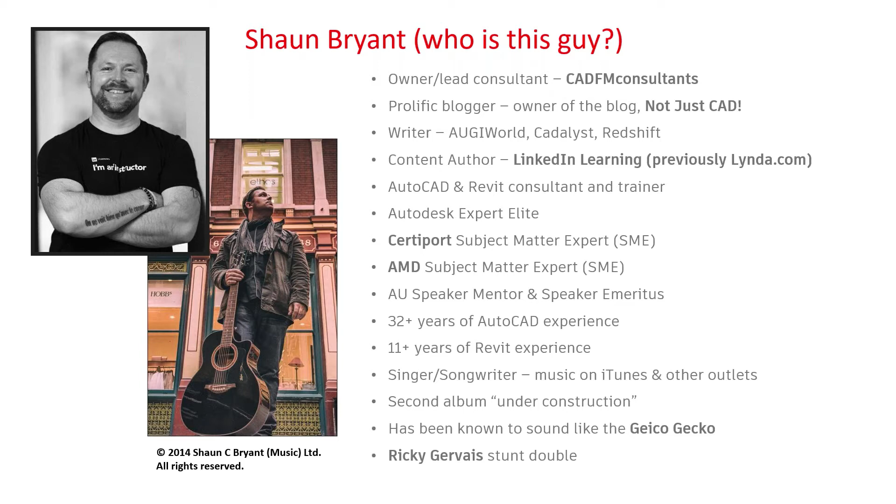So let's jump into the presentation now. The key concepts that we're looking at are AutoCAD, the full AutoCAD, versus AutoCAD LT. What you can see on the screen is a visual comparison as to what you can do with full AutoCAD as against AutoCAD LT. You can see that in the full AutoCAD, we can do 2D, 3D. We've also got the application programming interface in there. We've got parametric constraints, data extraction, and CAD standards. Now, none of those, apart from the 2D, are available in LT, and that's what we're going to discuss today.

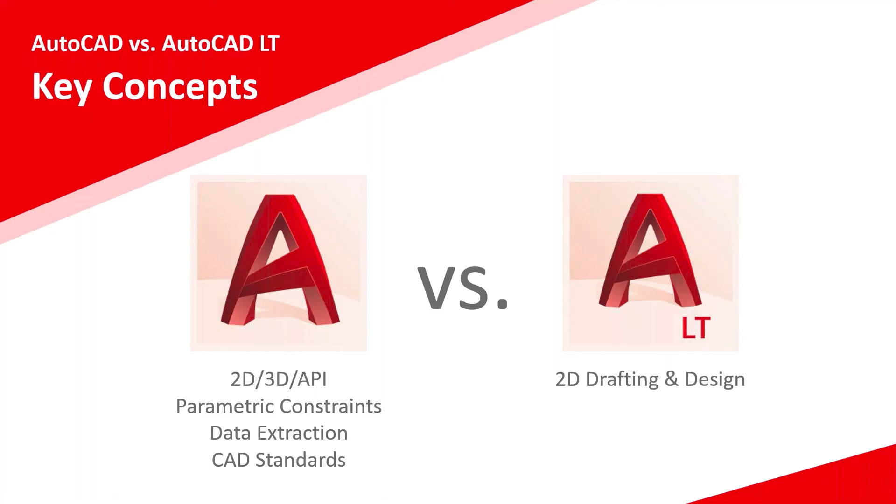We're going to see how, from a productivity and a time-and-motion kind of environment, AutoCAD stacks up against AutoCAD LT. Moving forward now into a really good visual slide, you basically get an 86% overall productivity gain. Now, there is a little asterisk next to that, and there's a little disclaimer at the bottom, basically saying that the study was designed by Autodesk and commissioned to an outside consultant. So your results may differ - you may not get exactly 86%.

But just to give you an idea, that means that when you're working in full AutoCAD and you're doing 14 hours work, that's pretty much the equivalent of 100 hours work in LT, or vice versa. If you're working in LT and you do 100 hours of work, you could do that in 14 hours, hence the 86% productivity gain. Now, what this means is an AutoCAD designer can generate designs up to 7.1 times quicker as compared to AutoCAD LT. That's a pretty cool statistic when you think about it.

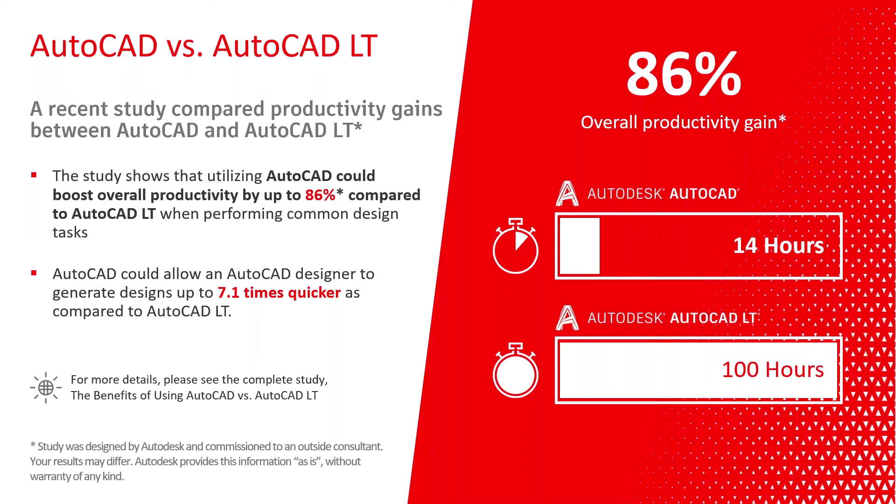And there is a productivity study available from Autodesk. It's called The Benefits of Using AutoCAD versus AutoCAD LT, which is the basis of the presentation today, and we're going to go through that in a little bit more detail. So let's have a look at what the productivity study actually covered, the time savings. Again, a couple of little asterisks there at the top, just to say that obviously every effort has been made to make sure that these tests are as fair and objective as possible.

Your results might differ from the percentages that I'm quoting here on the screen.

Parametric constraints in full AutoCAD offer a complete geometric and dimensional constraint creation, editing and management suite, giving roughly 33% time savings. When creating plans and elevations in full AutoCAD, you can save about 46% because you can manipulate 3D solids when 3D modeling to generate those plans and elevation views, rather than creating them from scratch in 2D in LT.

Isometric drafting is another fantastic tool available in both AutoCAD and LT. But if you create 3D objects, the isometric representations are just a couple of clicks, whereas in AutoCAD LT you've got to use 2D modeling and IsoDraft. AutoCAD can view these 3D objects in isometric views almost immediately using the view cube—I'll go into that in more detail later. The time saving here is 61%, which is huge.

Data extraction is one of my favorites in full AutoCAD, with a time saving of 93%. We've all been there, counting all the objects in a drawing. The data extraction command, not available in AutoCAD LT, interrogates the drawing, providing block, attribute data, and various other pieces of data that can be taken out of the drawing and put into an Excel spreadsheet or database. You can even add an AutoCAD table.

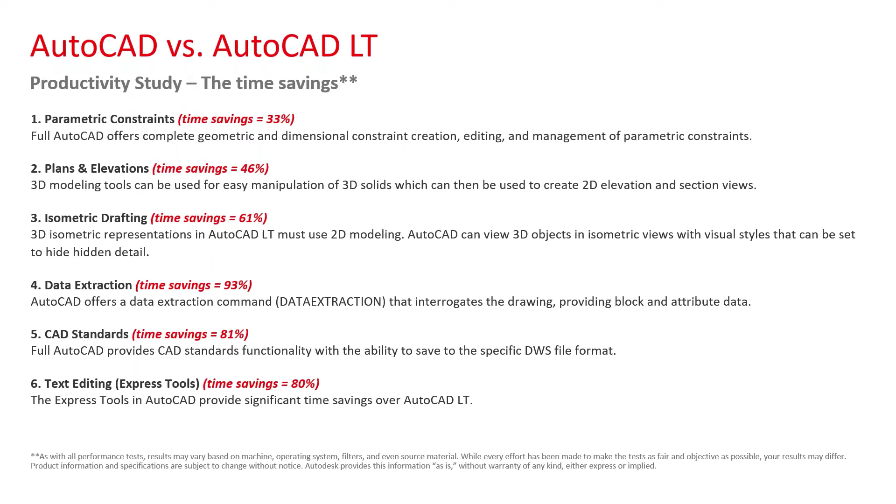So let's move into the first one—parametric constraints. You've got geometric constraints, which relate to geometry, and dimensional constraints in full AutoCAD, with a time saving of about 33%. This means you can assess the geometric and dimensional constraints using the show and hide functions, so they're not there all the time. You can switch them on and off like your layers, and edit or delete those constraints where applicable to allow the design to meet any changes in the specification.

There's no constraint creation in AutoCAD LT, but constraints can be edited and deleted in AutoCAD LT, which can sometimes put the cat among the pigeons. You might delete a constraint in LT, and when it goes back into full AutoCAD as a DWG file, that constraint isn't there anymore. So you have to put controls and procedures in place, especially if you've got a combination of full AutoCAD and AutoCAD LT as your drafting platform within your organization.

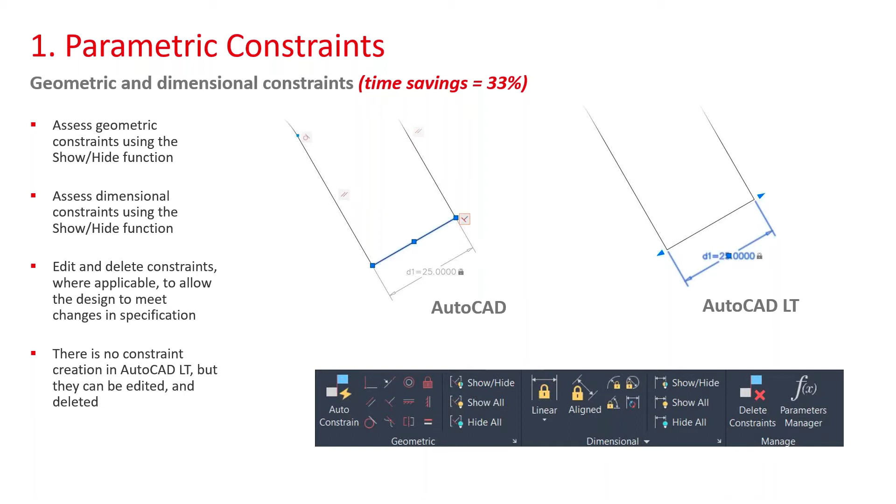What I'm going to do now is jump into a really simple little video that takes us through a simple bracket drawing—you can see at the top of the AutoCAD screen it's bracket.dwg. I'll run the video now and explain what's going on as we go. We've got the parametric tab in full AutoCAD, and what I'm doing now is hitting show all for geometric and dimensional constraints, of which there aren't any at the moment. Then we'll jump through all of the settings.

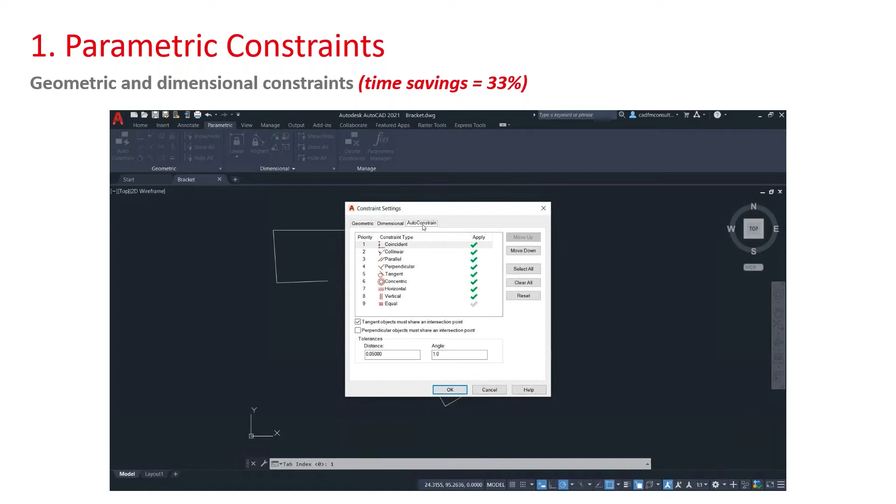You can see that's our geometric constraints for our geometry. If I hit the arrow on the panel, you can see you can put names and expressions in for your dimensional constraints, for example. Then auto constrain—a fantastic function in full AutoCAD—applies constraints to all of the geometry for you automatically. So what I can do here is select everything using a crossing window, press enter, and there are my auto constraints; they've all appeared, and AutoCAD has created those for me. I can then start thinking about concentric constraints, like making sure the hole in the bracket is concentric with the arc at the top.

And then I'll make sure that we've got some coincident points to join up that gap, so those points now are always coincident together. And then we'll start working on some of the line work there, making sure those lines are parallel to each other. And then we don't want a wonky corner there, top left, so we're going to make sure that that's perpendicular as well.

So all of those constraints will hold that bracket together now, and that's our geometry in place. So now we want to think about dimensions of our bracket. I'm picking those 2 points there and applying an aligned dimensional parameter, and I'm going to put an expression in saying D1 equals 25. So that now becomes the D1 constraint, which is 25 units long and it's locked.

I can then consider something like a linear, horizontal, or vertical constraint. I can go linear here because I know that this is already perpendicular to the lines - remember, we put that geometric constraint in. And that's going to become D2, but I'm going to say that D2 equals D1 plus 3. So I'm adding those expressions and tying everything down to pull the bracket together.

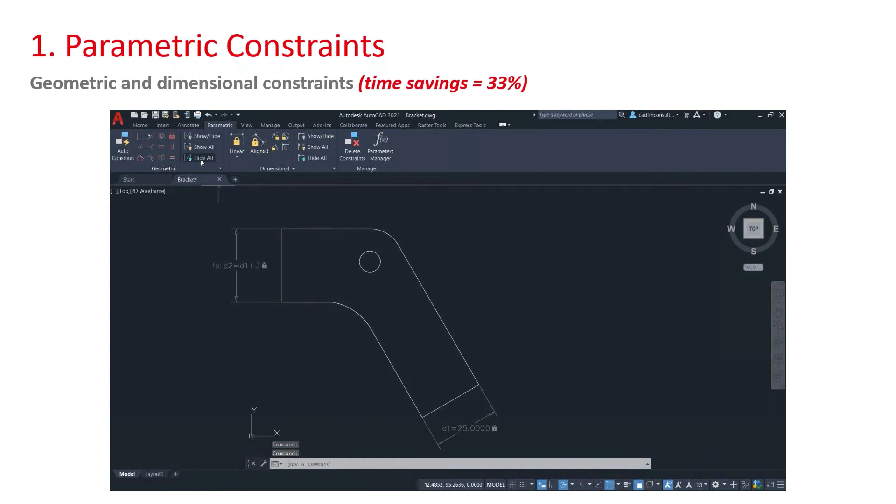Now, obviously that looks a little bit on the messy side, so I can hide all of my constraints like so, and it just looks like a normal AutoCAD drawing now. But what you've got to bear in mind there is you need to interrogate the drawing and switch them back on by using show all if you want to edit and make any changes.

You can also delete constraints if you don't need them anymore. You can delete all of them if you want to. I don't recommend it if you want to constrain the drawing, but you get the idea there.

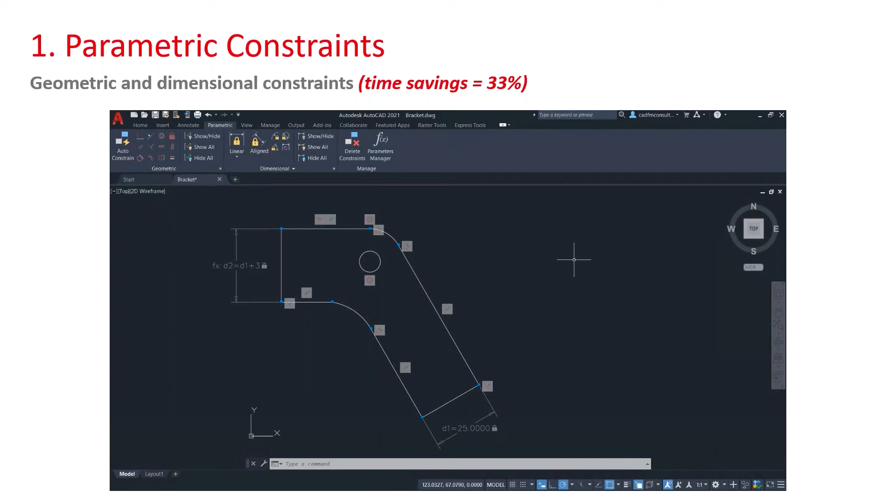So you can see how quick and easy it is, just in those few moments, how to constrain that little bracket drawing both with geometric and dimensional constraints. It's a massive time saver, and it means now that that is a parametric bracket and you don't have to go in and edit everything individually. You can just edit the constraints instead, and the bracket will obviously update accordingly.

Into the second part now of what the productivity study gave us, and that was the plans and elevations. Now, what I want you to do here is have a look at the AutoCAD and AutoCAD LT shots that I've got there in the slide. Because what we're looking to do is create a plan view of our wall and an elevation view of our wall, but also display the window position in the plan view and in the elevation view.

So in AutoCAD LT, I would have to develop all of that. I'd either have to draw the plan view first and then put the dashed gray construction lines in, and using object snap tracking, draw in the window position and the wall position.

Now, if you go over to the AutoCAD graphic there on the left, you can see the LT graphic in an isometric plane on the left-hand side, but you can also see a 3D representation of the wall and the window. What you've got there is if you're in 3D, you've got the ability, and this is where the time savings of 46% come in, to just flick through the preset views in 3D to get a top view, a side view, which in essence would be an elevation view.

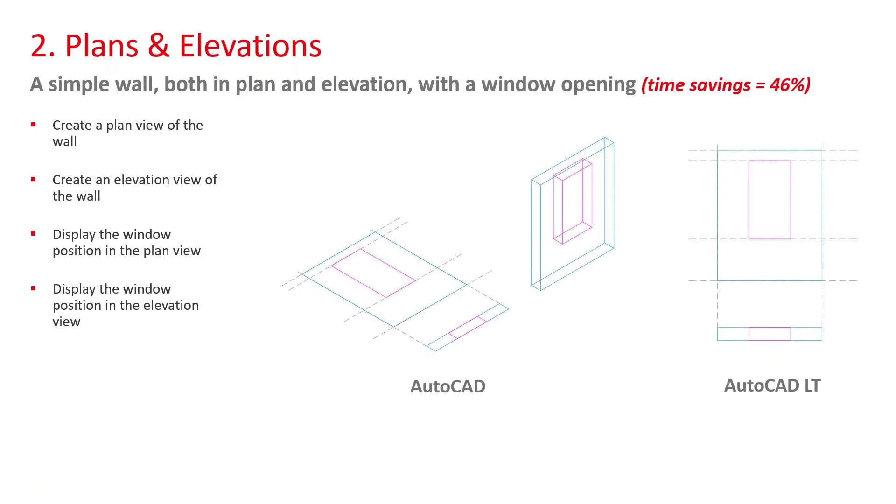So let me just explain that by way of a video - as they say, a picture paints 1,000 words, or in this case, a video. So we'll jump across. And as you can see there, I've got all the construction lines in place on the left. Imagine that that is AutoCAD LT on the left, which kind of goes against the slide, but it's just the way it is in the drawing. And the little plan view on the right is actually a 3D representation of the wall, but we're looking at it in the top view in the view cube. So let's run the video, and what we'll do now is we'll place our wall and our window in our 2D representation.

So I'm just going to utilize the rectangle command on the draw panel, and good old object snaps. I can pick that corner there, and I'm on the walls layer, so I don't need to worry about the color or line type, etc. So there's my wall representation.

I'll jump into the windows layer now, and what I'll utilize now is a little bit of polar tracking and object snap tracking, which I'm sure you've all utilized before. So I'll hover over that corner there, come up to the intersection with the construction line, and again hover over the other corner in the plan view and come up to the other construction line. There's the intersection, and there's my window representation in 2D. So that's all flat, and I've had to draft all of that manually.

Now here's the trick. What I can do now is a little 3D orbit there. My wall and my window are already there in 3D. So I've already got a top view, front view, side view, etc. all in place already. They're just dumb 3D solids to represent a wall and a window at the moment. I can go into a lot more detail later in the 3D modeling.

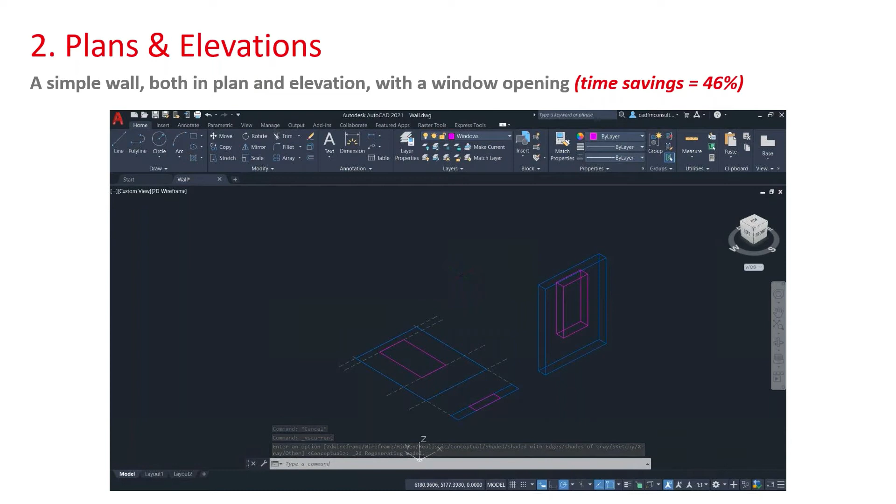And then if I jump into the conceptual visual style as well, one of the benefits you have there is you can apply colors and materials in 3D to give you a much more realistic view of your wall and your window. And the trick there is that you've got that fantastic view cube, and the view cube just saves so much time.

I can look at the front view, there's my elevation. And what I can do there is jump to the top view, and there's my plan view there as well. Saves me having to draft everything individually. Those views are already there because I've already got the 3D solids that represent that wall and that window.

So that's where, in an overall perspective, you're getting that time saving of around 46%. So you can see there in full AutoCAD, if you're working in 3D as against 2D in AutoCAD LT, it gives you an automatic time saving because you can start developing things using 3D solids and utilizing the preset views in things like the AutoCAD View Cube as well.

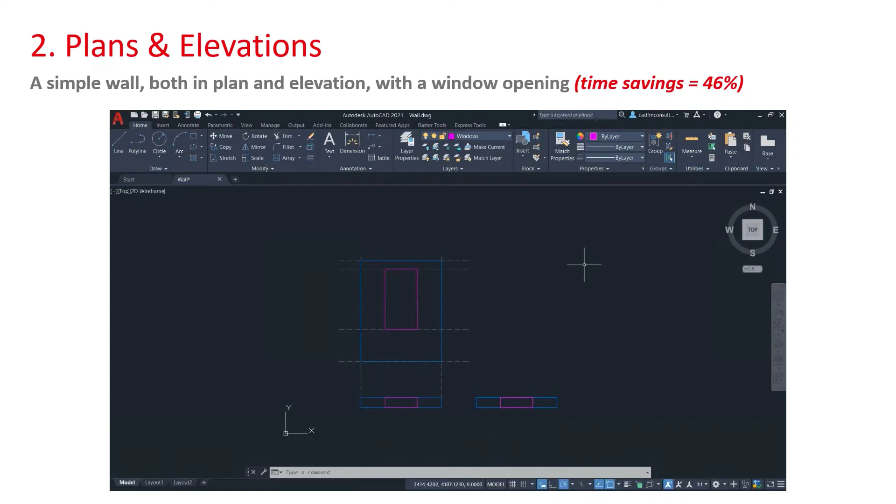Moving along now, we're going to have a look at isometric drafting. Now, this kind of relates to the previous video a little bit. And what we're going to look at is an isometric view using the X, Y, and Z axes in their isometric positions. Now, the time saving here is 61%. Now, again, you might not get 61%. You might get more even, depending on what you're doing at the time.

Now, the object shown in the drawing is a simple rectangular base with a circular hole through the center. And again, we've got an AutoCAD view and we've got an AutoCAD LT view. Now, the AutoCAD LT view is purely 2D draftsmanship. So what we've done there is we've utilized what is called the IsoDraft setting on the status bar, and we've drafted all of those lines at the 30, 60 degree angles to get an isometric view of a base.

And an ellipse there in the center of that top face. Even though it isn't a top face, it's a 2D representation of a top face, gives you what looks like an isometric view of a solid base with a hole through the middle. The AutoCAD view on the left-hand part of the slide there is actually a 3D solid with a 3D hole through the middle. So again, it's that 3D versus 2D argument again with the AutoCAD and the AutoCAD LT.

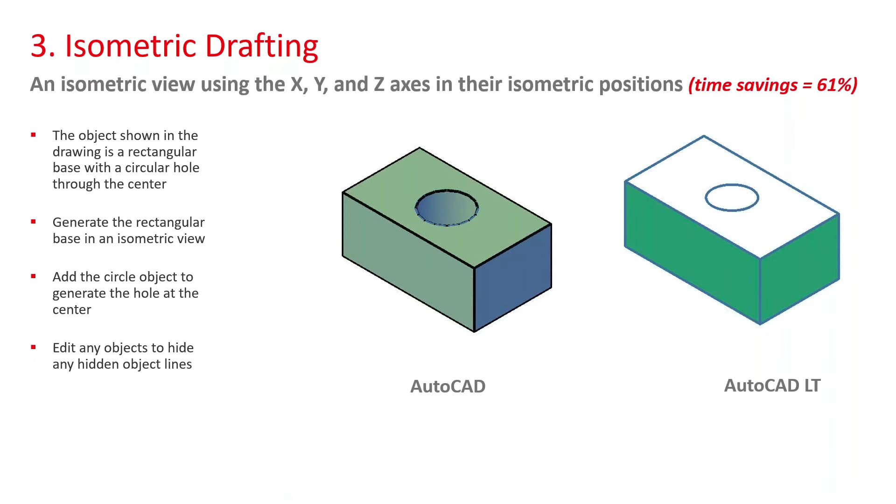And what it means is you can generate the rectangular base in an isometric view. You can do that using IsoDraft in 2D, but if you do it in 3D, again, you've got those preset views on the view cube in full AutoCAD that you can utilize. And more importantly, the hidden lines can be hidden using various visual styles if need be as well. So let's jump into another video and I'll take you through this again very briefly on how you can get those time savings of 61%.

So you can see there on the left, that is purely 2D drafting. There's a hatch pattern and there's some lines representing what looks like a rectangular base with a hole in it, and that's the ellipse that I mentioned.

Now, if I start looking at IsoDraft there and switching on the status bar, can you see I'm changing the positions of the lines, the axes on the cursor, and that basically kind of works in an orthogonal kind of setting, because what it does is it ties you down to drawing lines at those angles in the IsoDraft to allow you to create that 2D representation of that isometric view of the base.

Now, if I jump over to the view cube, you'll see now we've got a 2D wireframe view of our solid base. If I go to conceptual, you can see that that is a solid, and if I look at the top, I'm looking straight through it. There's a hole through that solid.

And just like in the previous video, you can see we can jump around and pick any view we want on the view cube to look at our little rectangular base with the hole in it.

But the funny thing is, and this always throws me when you're creating 2D isometric representations, as soon as I go to an isometric view with the view cube of the 3D solid, you can see that the 2D AutoCAD LT representation goes all wonky and skewed. That's because it's purely a flat 2D representation of an isometric view.

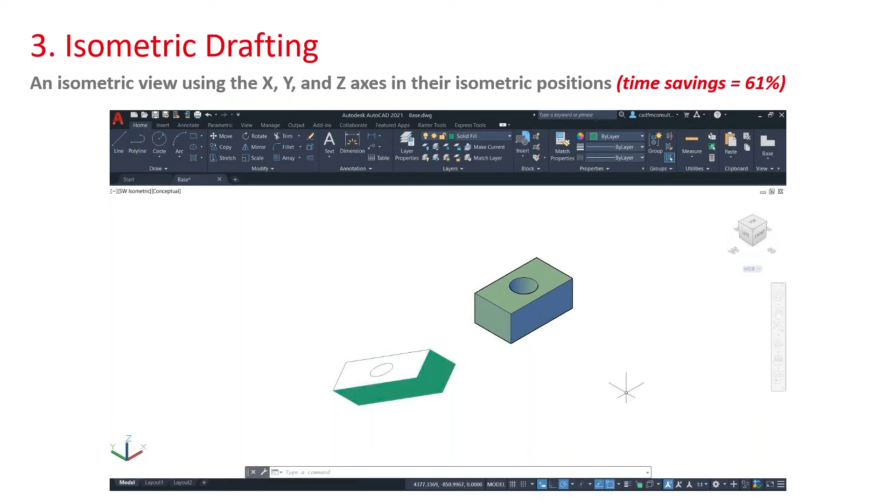We're now going to look at one of my favorites. Data extraction is a fantastic tool. I loved this as a CAD manager. The name of my company is CAD Consultants, and I worked in a lot of facilities management environments with AutoCAD and with a lot of computer-aided facilities management tools and things.

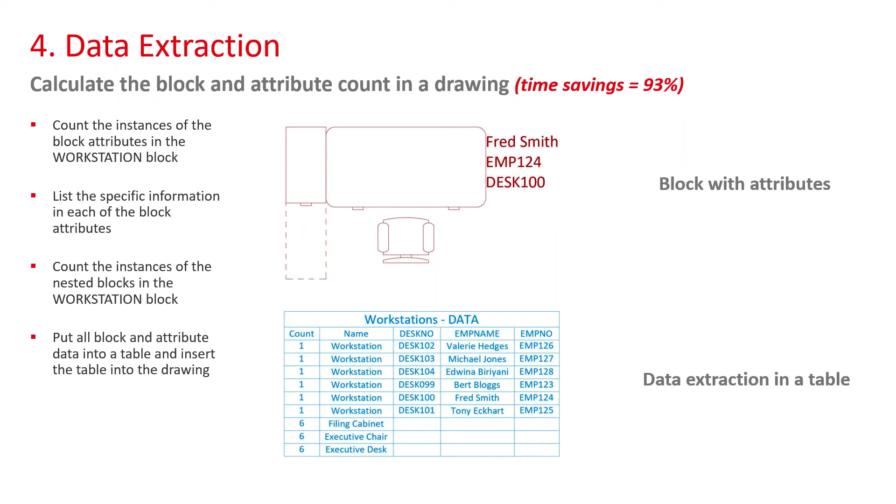Those are the nested blocks that are then converted into one block, the workstation block, which has those attributes against it, the Fred Smith, the employee 124, and the desk 100. All of that information can be taken out of your drawing and put into, as you can see there, an AutoCAD table, or it can go externally, to something like an Excel spreadsheet or an Access database in an MDB file, for example.

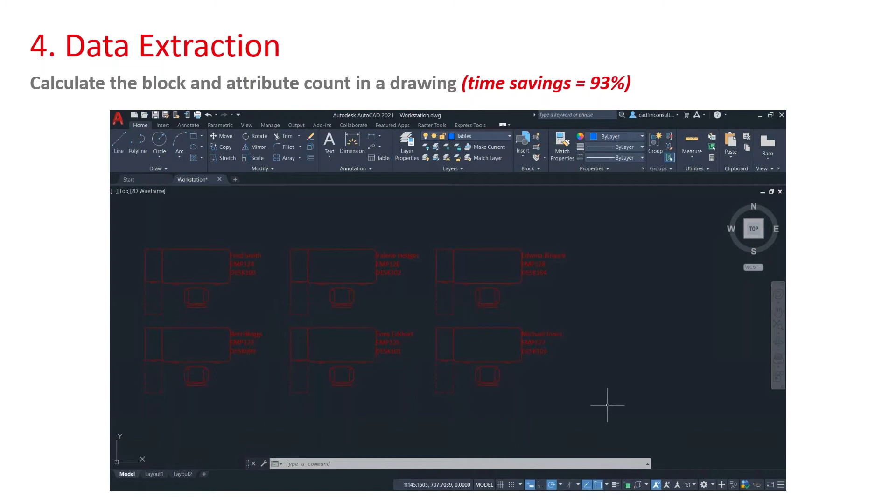So here's another little video for you, and as you can see, we're in AutoCAD and we've got 6 of those workstation blocks all set up. When I run the video, if we just hover over some of those, you'll see that they are a block with the attributes. So there's Michael Jones there, we've got Edwina as well, and all of these employees have their own desk, and obviously it's a block with attributes.

So what I've done, I've just jumped into the tables layer, and I'm going to go to the Insert tab now, and I'm going to run the Extract Data command in the Linking and Extraction panel. This is fantastic because it takes you through an 8-step wizard.

All you've got to do is literally follow the steps, step by step, setting the settings in each particular page. So what I'm doing here is I'm saving my DXE file, my data extraction file, because then it'll remember all of the settings that I've set up in the wizard, and I can go back to it and open it up again. I'm overwriting the one I created before the presentation to test it.

So you can see there that we're using our current drawing, and I can go in there, I can add additional settings. I can also add other folders and other drawings to extract data from.

It doesn't have to be one individual drawing, for example. I can also select, as you can see there, individual objects.

Now, when I jump to the next step, you can see I've got various options available, and the display options are at the bottom. So what I'm doing is setting up my display options to show what I want to see: my objects, my display names, the type of objects, and so on. And now you'll notice it brings up everything, every single piece of information.

Now I can switch those off individually if I want to, or I can utilize my category filters. So 3D visualization, we don't need that. We don't need the general, we don't need the geometry, the miscellaneous, or the text. All we need are the attributes, so I just leave attribute ticked, and there's 3 properties that I'm going to extract.

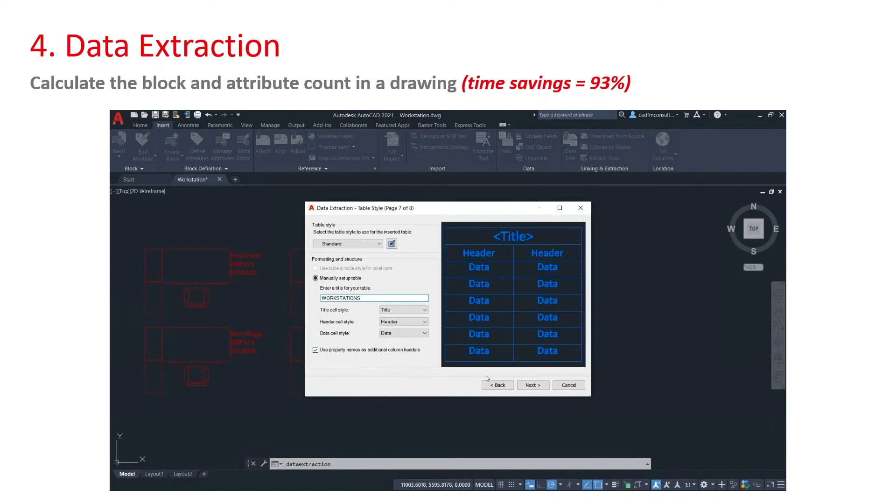So I can insert the data extraction table into the drawing, and the output data can go to an external file if I want to. I'm not going to worry about that in this case, and all I'm going to do is drop a table now into my AutoCAD drawing, just using the standard table style, I haven't got any other ones set up. I'll give the table a title, so I'll pop some text in there saying workstations. And I can change the title, header, and data cell styles if I want to, and I click on next. Now it's finished to complete the extraction.

I click on finish. Now my table's a little bit small, but I'll drop it into the drawing anyway. I'll zoom in on it, and there's all my information there. So you can see it all there already, but I'm just going to make it a bit bigger so that we can see what's going on.

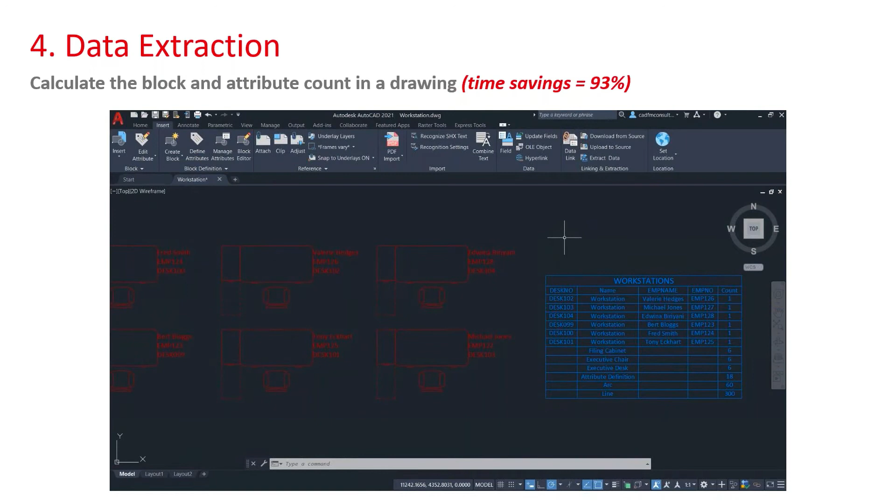So I'll just scale that up, pick a base point, and we'll give that a largish scale factor of, say, 20. Now when I zoom out, that table will be bigger, and I can read all the information, and it relates to the workstation blocks that we've got in the drawing itself. So you can see how quick and easy that is.

That was really fast. Now, obviously, I've only done 6 blocks there with attributes, but imagine if you've got 500 desks on a big office floor in a big corporate building. That's going to save you so much time. That's why you've got that massive time saving of 93%. That data extraction tool, when you're using blocks and attributes, is fantastic. It's really quick, and it's one of the things that always makes me vouch for full AutoCAD as against AutoCAD LT.

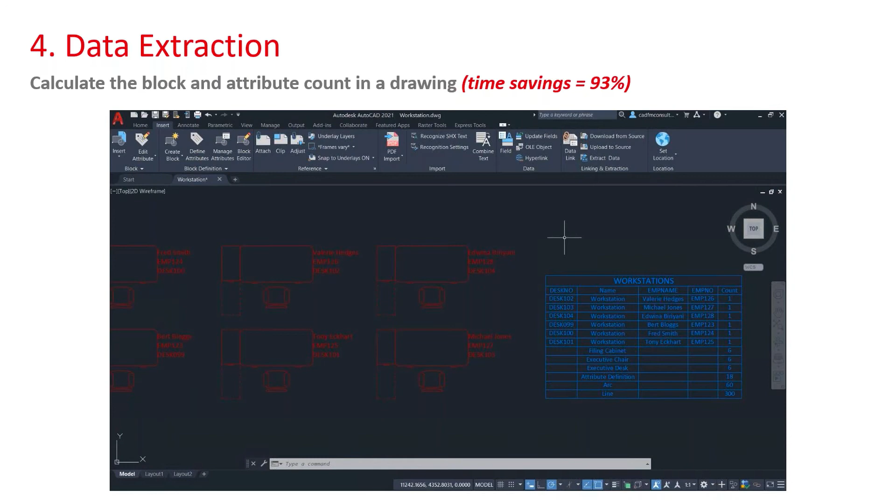Another one that I used a lot, especially when I was a CAD manager, was the CAD Standards functionality in full AutoCAD. So you've got the ability to check layers, text, dimensions, and various other things against what they call a preset CAD standard, that's your DWS file.

So what you do is you locate the CAD standard, the DWS file, and you then link it to the DWG file that you're working with. You check and adjust any perhaps third-party drawings, and the DWG file is then adhering to the appropriate standard moving forward. I used this one hell of a lot when I was working with third-party drawings coming into my company, and I needed to make sure all the drawings adhered to my standards, so that everything worked with the project and worked accordingly.

So again, I've got another little video for you, and we'll jump into the video.

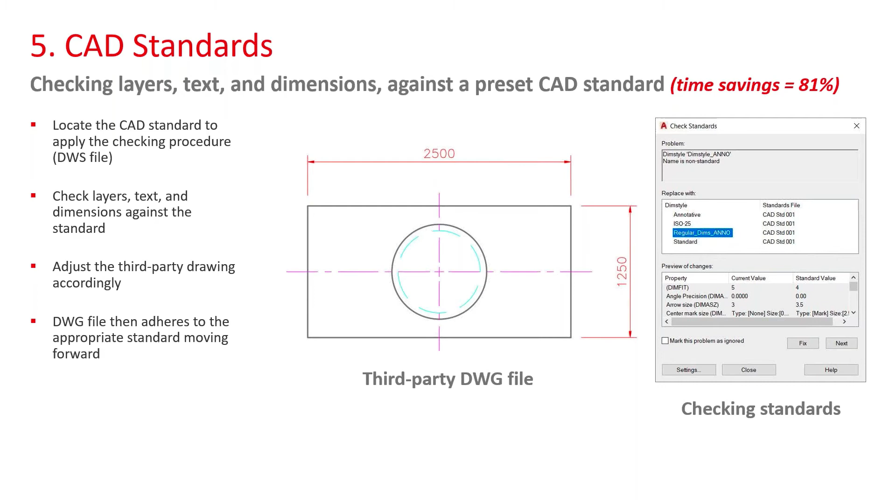So there's our little third-party drawing, a little project drawing.dwg file. The dimensions themselves are great, they communicate your design intent quite happily, and you've got your different line types and different colors for center lines, the outline, and some hidden detail there on the little circle in the center.

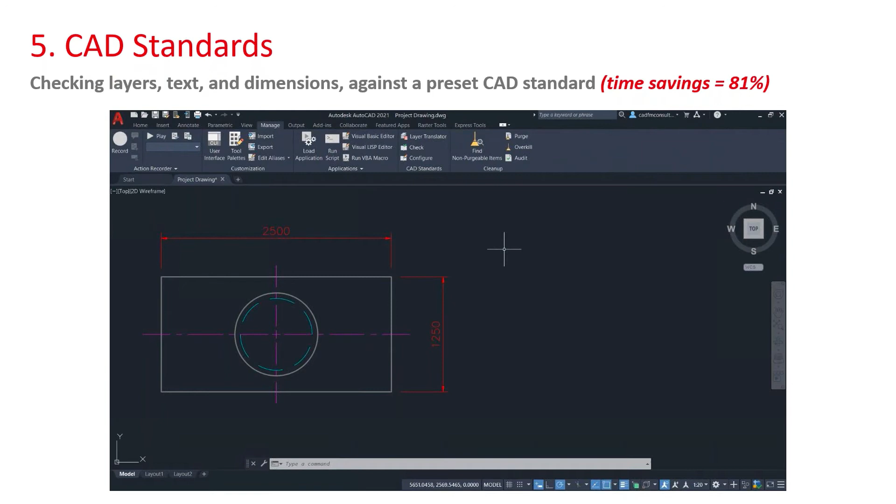So if I now go to the Manage tab and go to the CAD Standards panel, I can configure my CAD Standards setup. So what I'm going to look for now is my DWS file. I click on the plus sign, and there's my CAD Standard 001.dws. Now you create that from a blank drawing with all the settings that you need and save it as a DWS file. That's now been associated with the project drawing.dwg file.

What I can do now is start checking my standards. So I go up to check, and there's the dialog box I mentioned. The idea now is I just work through each of these problems that pops up. You can see there's the dim style there that's non-standard, and I can say okay, I want to apply that, replace with regular dims anno, or I can mark it as ignored. So it jumps to the next problem.

And then what I can do is click on next, like so, and it always gives me the option to jump to the next problem. All I do now is go through and select what I need to change. So you can see that the layer outline is going to the layer objects, for example. The layer text annotation, I go and replace it with one of the layers, which in this case is text in the DWS file. And every time I hit fix, it's actually updating those in the DWG file.

So what it's doing is swapping out using the information in the DWS file and updating the third-party drawing as we go. Now there's a lot of information here, and all I'm doing is hitting fix and next, fix and next. It can be a laborious task, but the one thing I will say here, if you look at the time saving, it's much quicker to do it this way, and then you know your drawings are adhering to a known standard.

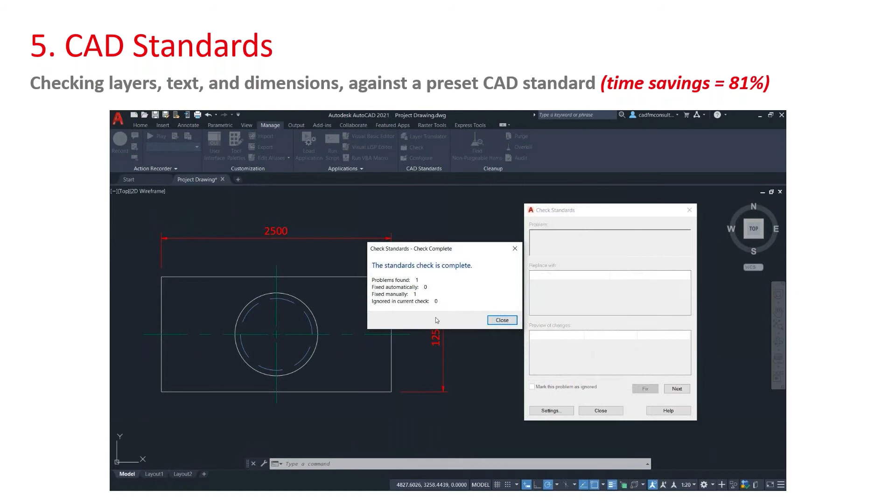I'll switch off the ignore tick box, click on next, and what you'll find this time is there won't be any more problems. So I'll make sure that we've got the appropriate dim style and fix it, and you can see there that the problem has now been fixed manually. I can close that, no more problems, close the dialog box, and my drawing has now been updated to my standard that I had in the DWS file.

And you can see that in the drawing itself, the color there has changed on the center lines, the font has changed on the dimensions, little things like that. And it's little things like that which take up all that time when you're working in AutoCAD LT. The trick here: in full AutoCAD, create the DWS file and check all the drawings against it. Saves a lot of time, 81%.

Moving along now, we're going to have a little look at the text editing in the Express tools. Now, I love the Express tools in AutoCAD because there's some really wacky and diverse functionality in there. One of the ones I love is putting text along a curve, for example, which you can't do in LT.

Because you haven't got the Express tools. But we're going to look in this case at converting some single line text to multi-line text, changing the text from all uppercase to what I call mixed case or sentence case. We're going to enclose the text in an AutoCAD object, a rectangle, and then that allows for quick and easy text editing to communicate your design intent because it's all multi-line text, and multi-line text allows you to work almost like a word processor.

But again, time savings. Look at the time savings you get in the slide in this case, 80%. And you'll see why when we jump into the video in a moment. And if you look, we're changing the text from the before option there in the slide to the after option there in the slide. And you can see the difference.

But if I jump into the video, it's again, a video paints 1,000 words, as I say. So if I jump into this one, you can see there's our text there in our drawing. If I hover over that, you can see what we've got there is each line of the text is a piece of single line text. And I want that to be multi-line text. So I'm going to go up to my Express Tools tab on my ribbon.

And you can see there's some really cool functionality in here, and a lot of this has been written by third-party developers. I'm going to hop over to the text panel in the middle there. There you go, there's text, and I want to convert to Mtext. And all I've got to do here is select the text I want to convert, so I just select all of them, each one, just a little click on each bit of text and press enter.

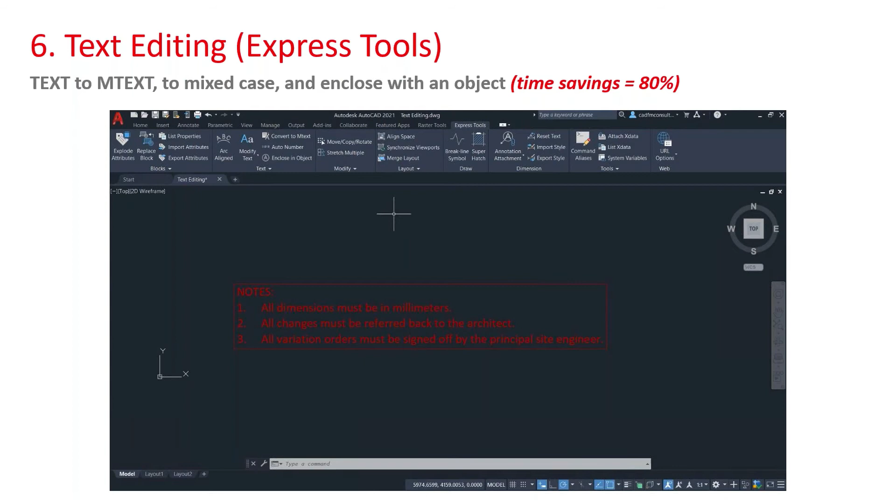I haven't actually got a video for the next one, but I do want to talk you through it because it's really important. Full AutoCAD offers what they call an application programming interface, an API. Now, some of you might already be programming in AutoCAD. You might have some macros, some routines that you've created, perhaps using Visual Basic or Visual Lisp.

And there's an applications panel there. You can see it on the slide top right, where you can load up the application and then run the script, for example, if you want to run the script within AutoCAD itself. And what you're doing there is you're utilizing user programming through the API to automate some of those tedious, time-consuming tasks. So, for example, RevCloud is a really good one. That was developed using the API.

It originally was an Express tool, and it's now come into the actual AutoCAD ribbon. It's not in the Express Tools tab anymore. It's actually coming off of the Draw panel on the Home tab on the ribbon.

That user programming is allowing people to develop apps that will benefit AutoCAD users in your team. You can jump onto the Autodesk App Store, you can see that on the slide there as well, and it's very easy to find. You just type in Autodesk App Store in your browser and you'll get that screen.

You can find various apps available for you in the App Store. Those time-saving apps are created by third-party developers using the API, but they're in essence selling their wares. So if you've got a macro, a routine, an app that you've developed, there's nothing to stop you becoming a developer and putting that onto the App Store as well. So again, another time saver.

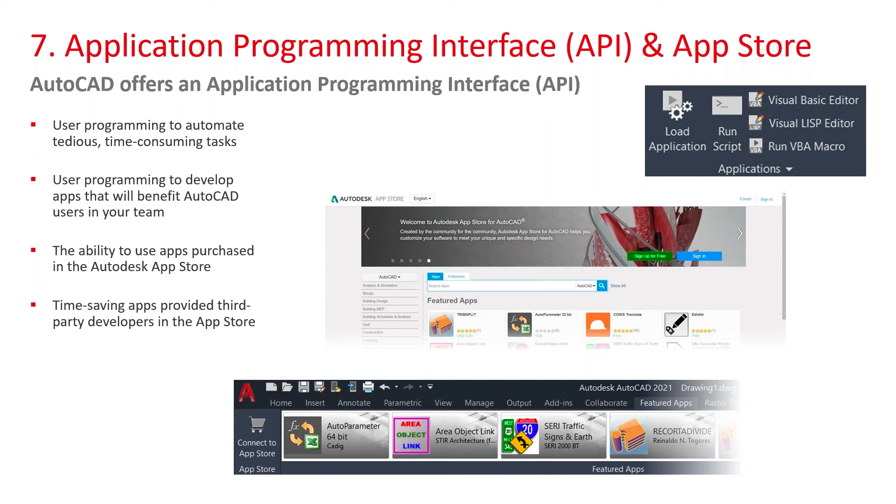And there's the time savings, which is the ones you've seen on the slides and videos so far. To give you a rough idea, performing those 6 tasks in AutoCAD LT, roughly speaking, is 5 hours 44 minutes. If you did that in AutoCAD, it takes 48.5 minutes, and that's the 86% time saving we talked about earlier. So the overall time saving with AutoCAD is 86%, which means you've got a productivity improvement with AutoCAD. You're doing everything 7.1 times quicker. So there's your time saving and your productivity improvement.

It's kind of self-explanatory when you think about it. However, the one thing I will say here is I'm not going to knock AutoCAD LT. If you just want to do 2D drafting, it's a fantastic tool. I cut my teeth in AutoCAD on AutoCAD LT many years ago. I used it for many hours, and it's a great product.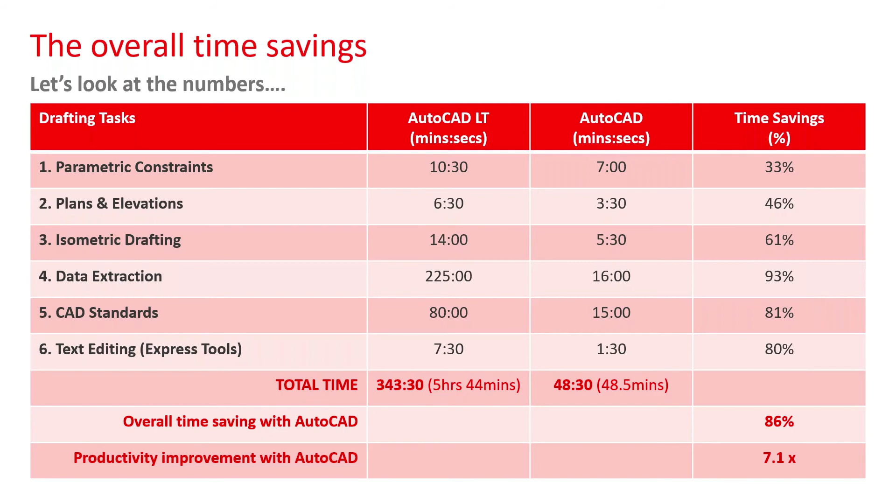Now, one of the things you will find is if you sign up for an AutoCAD subscription, you don't just get AutoCAD, you also gain access to industry-specific tool sets. So you get these 7 specialized tool sets as well: architecture, electrical, mechanical, MEP, Map 3D, raster design, and plant 3D. So you can work within various industries.

One of the ones that I often use is the electrical one. It's a totally different workflow to regular AutoCAD, but it's different because it has to be, because you're working in an electrical environment rather than just a vanilla sort of 2D or 3D drafting environment in full AutoCAD.

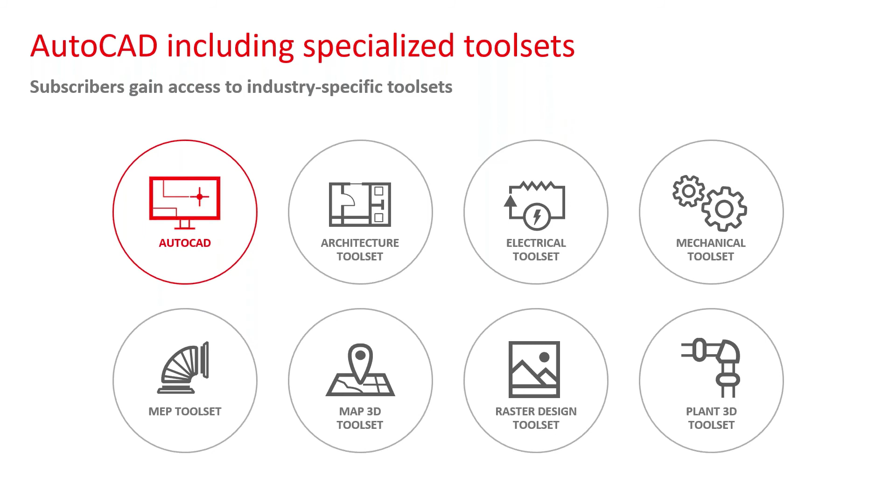Those specialized tool sets, the key benefits with full AutoCAD in this case—you wouldn't get the tool sets with LT—is that you've got access to loads of libraries of symbols, parts, detail components. I mentioned the electrical tool set; that's full of symbol libraries for all the different electrical components you put in electrical drawings and instrumentation drawings.

It also allows you to be faster. You've got creation of annotations, layers, and properties, and it's automated in some of the tool sets. However, it's familiar—it's the AutoCAD interface, the good old AutoCAD engine that you're driving, just with an industry focus in the toolset.

It's also efficient. You can extend these workflows across your disciplines more effectively, because it may be that you're working in, let's say, the electrical environment. You can create your drawings in AutoCAD Electrical, the electrical toolset. They can then be shipped out as regular drawings if need be. But you've got that industry specific discipline information in the drawing if you need it as well.

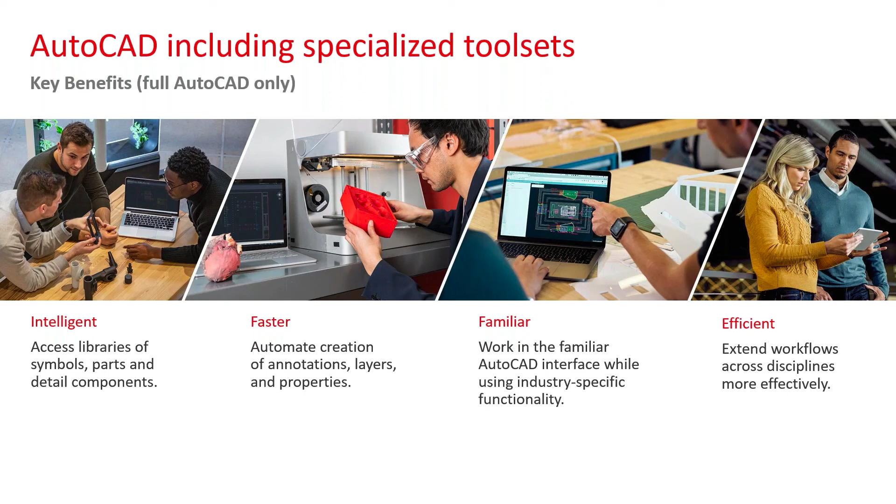Now the subscription benefits are - and these are for AutoCAD and LT, I hasten to add - when you go onto your AutoCAD subscription: technical support, up-to-date software, flexible term lengths, and administrative tools. These are all available. The flexible term lengths is a really good one because you can sign up for a specific period of time.

You're not there all the time. So you might have a big project on the go where you're bringing in, say, 50 CAD draftspeople through an agency because you need that workforce at the time. So you subscribe for a particular term length, and once you're done, you can say to Autodesk, I don't need those anymore, can you take those off my subscription? Obviously, from a monetary perspective, you're saving money there, and you can be really flexible and agile with your workforce. As the workforce gets bigger, you sign up to more licenses; as it gets smaller, you bring that license count down. The admin tools allow you to do that quickly and easily.

Obviously, up-to-date software - if you're on subscription, you're always going to have access to the latest features and versions, but you can also go back to older versions if you need to. And you've always got the good old Autodesk technical support there as well.

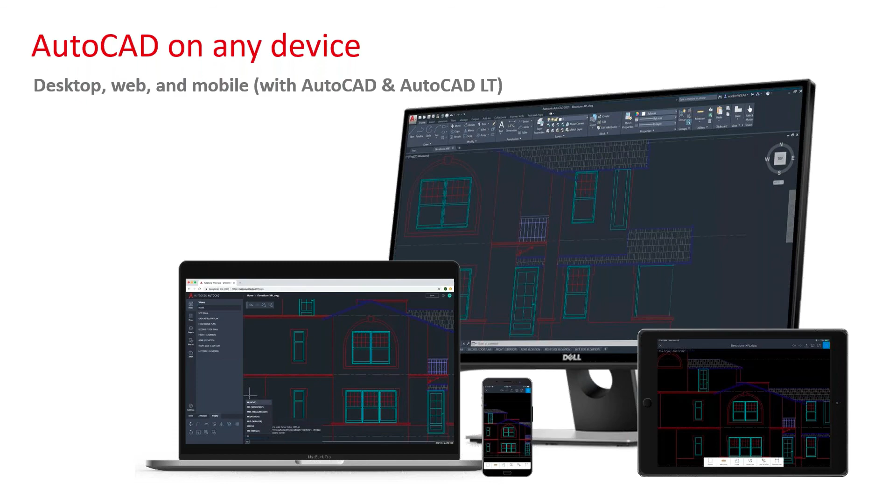Another thing you get with subscription, with AutoCAD and AutoCAD LT, is not only do you get the desktop app, you get the web app and the mobile app as well. So you can literally take AutoCAD anywhere - on your desktop monitor, laptop, phone, tablet. You can run it on any of those devices and take your drawings with you. So you can work anytime and anywhere. You've got that continuous connectivity.

What I love is it basically means you can take your work on the road with you. I remember back in the day I was using house bricks to hold drawings onto the hood of my car so they didn't blow away when I was working on site with the guys. Don't need to do that anymore. I can walk around with a laptop, a tablet, even a phone if I want to, and I've got access to my drawings. You've got extended workflows there.

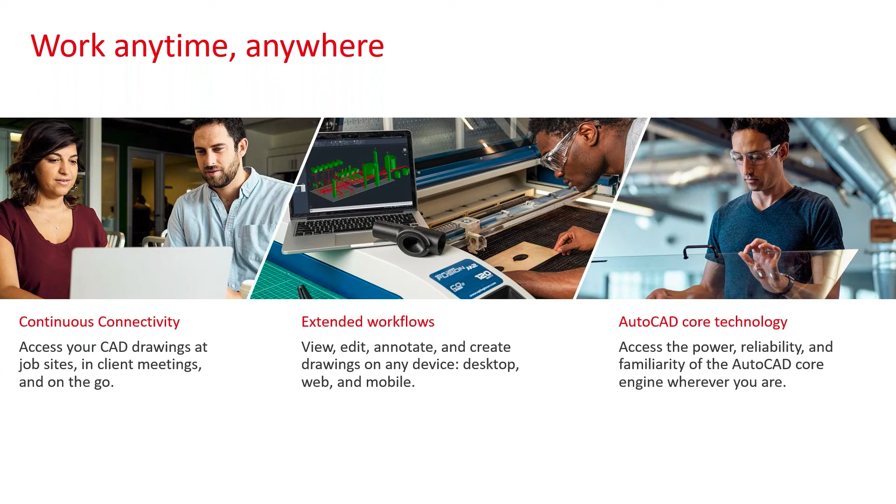I can be working on, say, an iPad Pro using either AutoCAD Web or the mobile app, and I've got that extended workflow. I can view, edit, annotate on any device - desktop, web, and mobile. But the benefit is it's all AutoCAD - you've still got that core AutoCAD engine, that core AutoCAD ethos, regardless of which device or app you're using.